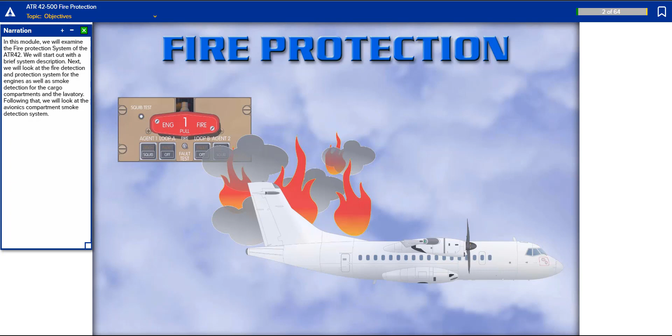In this module, we will examine the fire protection system of the ATR 42. We will start out with a brief system description. Next, we will look at the fire detection and protection system for the engines as well as smoke detection for the cargo compartments and the lavatory. Following that, we will look at the avionics compartment smoke detection system.

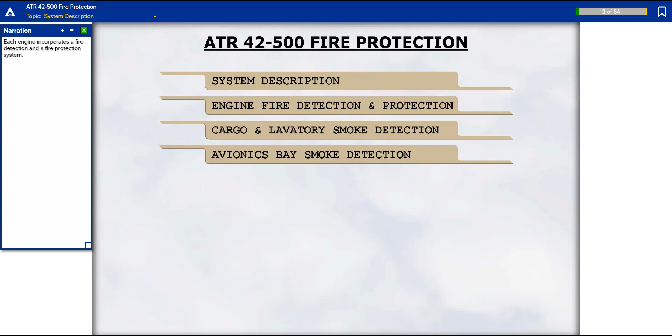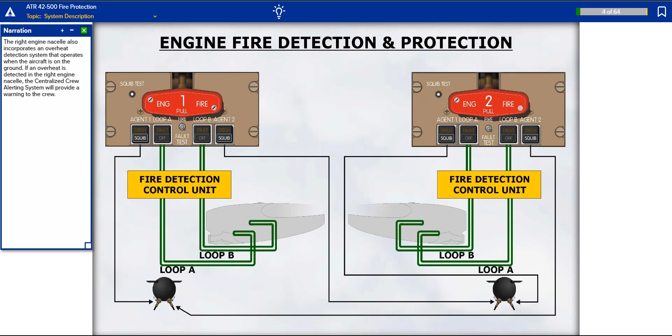Each engine incorporates a fire detection and fire protection system. The right engine nacelle also incorporates an overheat detection system that operates when the aircraft is on the ground. If an overheat is detected in the right engine nacelle, The centralized crew alerting system will provide a warning to the crew.

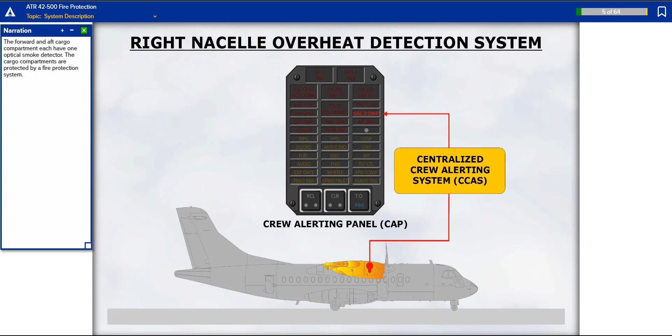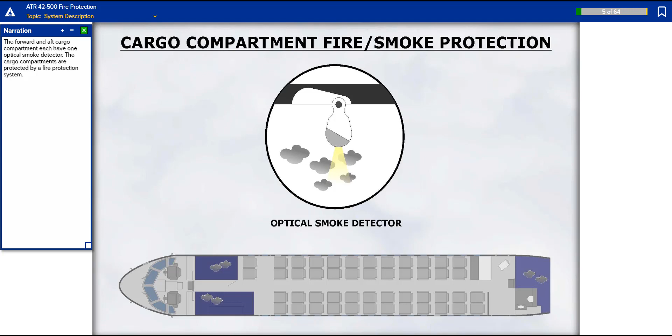The forward and aft cargo compartment each have one optical smoke detector. The cargo compartments are protected by a fire protection system. The lavatory uses a photoelectric smoke detector to provide an alert in the event there is smoke in the lavatory. A small fire protection bottle protects the lavatory waste bin.

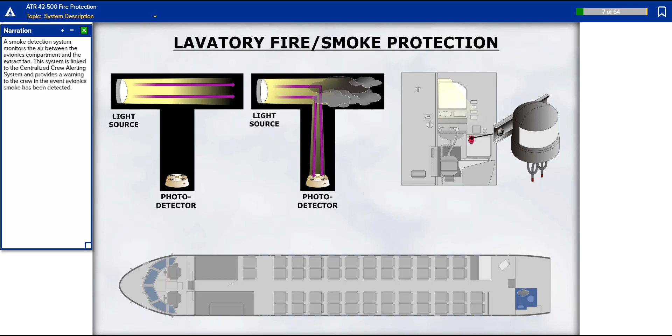A smoke detection system monitors the air between the avionics compartment and the extract fan. This system is linked to the centralized crew alerting system and provides a warning to the crew in the event avionics smoke has been detected.

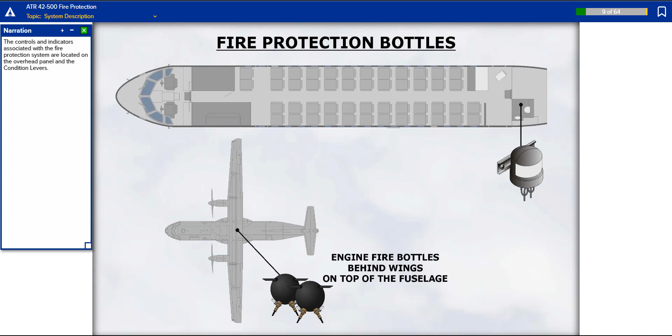Various fire protection bottles are located throughout the aircraft. The controls and indicators associated with the fire protection system are located on the overhead panel and the condition levers.

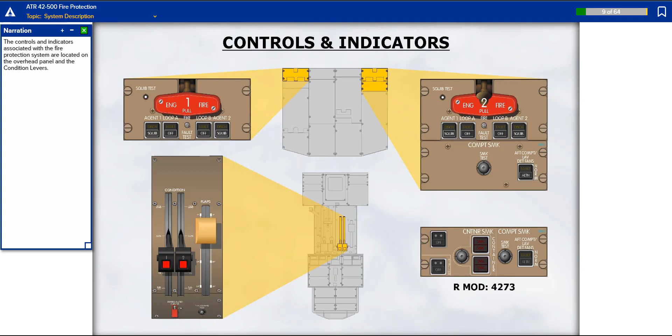Each engine incorporates a fire detection system. The system consists of two identical detection loops called Loop A and Loop B. These loops are parallel to each other, and they are connected to a fire detection control unit. The loops are powered by the DC emergency bus.

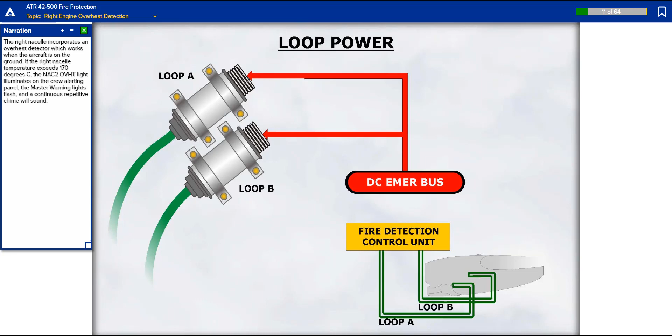The right nacelle incorporates an overheat detector which works when the aircraft is on the ground. If the right nacelle temperature exceeds 170 degrees Celsius, the Nacelle 2 overheat light illuminates on the crew alerting panel, the master warning lights flash, and a continuous repetitive chime will sound.

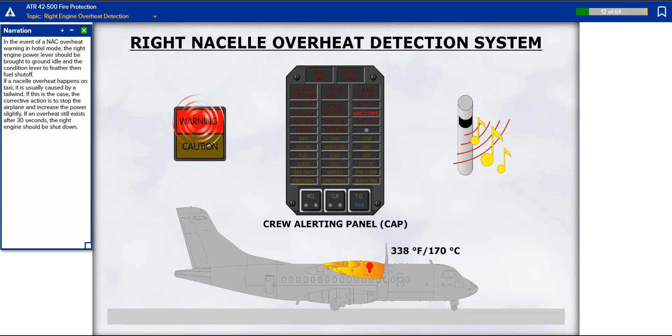In the event of a nacelle overheat warning in hotel mode, the right engine power lever should be brought to ground idle and the condition lever to feather, then fuel shutoff. If a nacelle overheat happens on taxi, it is usually caused by a tailwind. If this is the case, the corrective action is to stop the airplane and increase the power slightly. If an overheat still exists after 30 seconds, the right engine should be shut down.

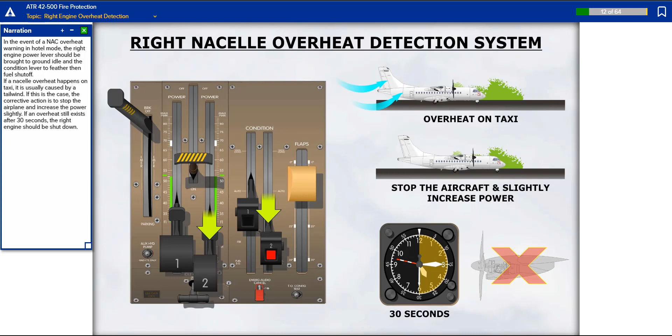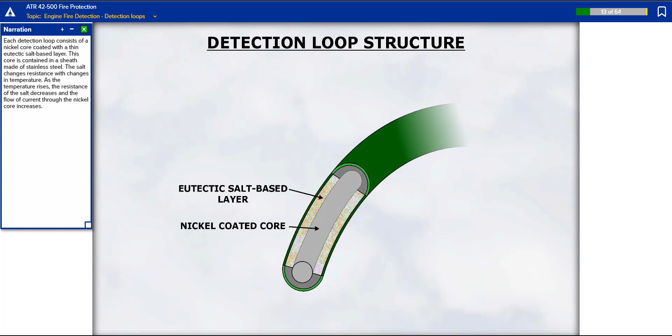Each detection loop consists of a nickel core coated with a thin eutectic salt-based layer. This core is contained in a sheath made of stainless steel. The salt changes resistance with changes in temperature. As the temperature rises, the resistance of the salt decreases and the flow of current through the nickel core increases. The electrical signal flows in a continuous loop to the Fire Detection Control Unit, or FDCU.

The FDCU measures the resistance in the loop as well as the capacitance. The FDCU will trigger a fire warning if there has been a decrease in resistance and an increase in capacitance of both fire loops. Both loops must detect a fire in order to trigger a fire warning.

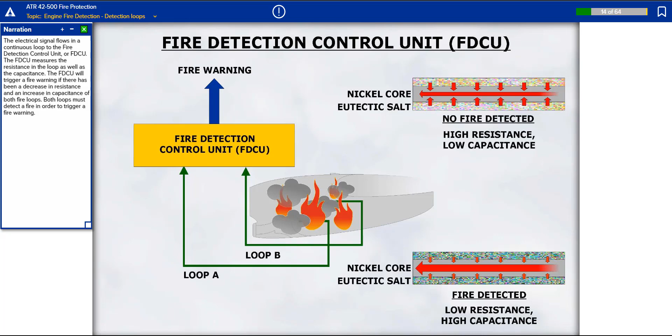If an engine fire has been detected, the continuous repetitive chime will sound, the master warning light will flash, the associated fire handle will illuminate red, a red fuel shutoff light will illuminate in the associated condition lever, and the associated engine fire light on the crew alerting panel will illuminate.

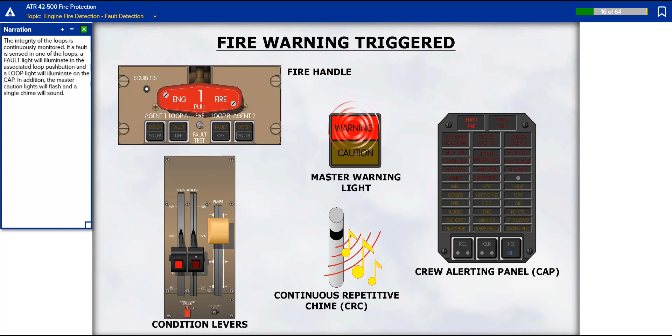The integrity of the loops is continuously monitored. If a fault is sensed in one of the loops, a fault light will illuminate in the associated loop push button, and a loop light will illuminate on the crew alerting panel. In addition, the master caution lights will flash and a single chime will sound.

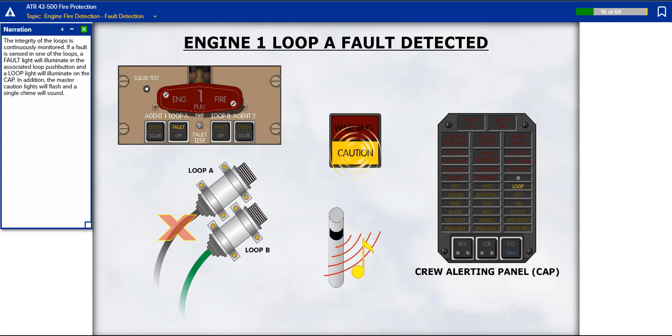If the fault light in a loop push button illuminates, it indicates that the associated loop has faulted and therefore must be deselected. If it is not deselected, the system will not be able to detect a fire since both loops must be in agreement. The affected loop is deselected by releasing out the push button with the illuminated fault light. This reconfigures the associated fire detection system so that only the other fire detection loop is used to detect an engine fire. Click on the loop light with the illuminated fault light to reconfigure the system.

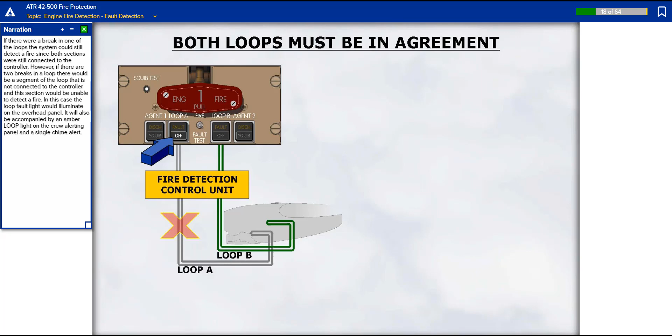If there were a break in one of the loops, the system could still detect a fire since both sections were still connected to the controller. However, if there are two breaks in a loop, there would be a segment of the loop that is not connected to the controller, and this section would be unable to detect a fire. In this case, the loop fault light would illuminate on the overhead panel. It would also be accompanied by an amber loop light on the crew alerting panel and a single chime alert.

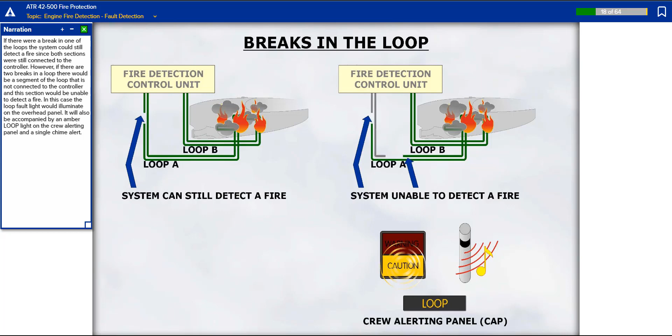Note that a broken loop would cause a decrease in the resistance of the circuit. But since there was no increase in capacitance, a fire warning would not be triggered.

Conversely, excessive heat in an engine compartment can trigger a fire warning even if there is no fire, for instance from a bleed leak. In this case, don't fire the bottle until it is determined that closing the bleed valve doesn't silence the fire warning.

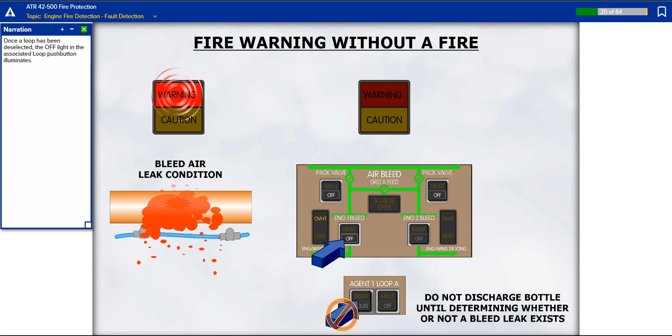Once a loop has been deselected, the off light in the associated loop push button illuminates.

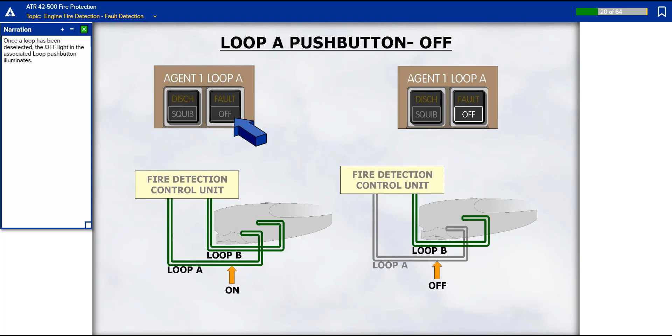The engine fire protection consists of two fire bottles. The fire bottles contain halon gas pressurized to 600 psi. The fire bottles are located on each side of the fuselage. The plumbing of the system allows the content of either bottle to be used to suppress a fire in either engine.

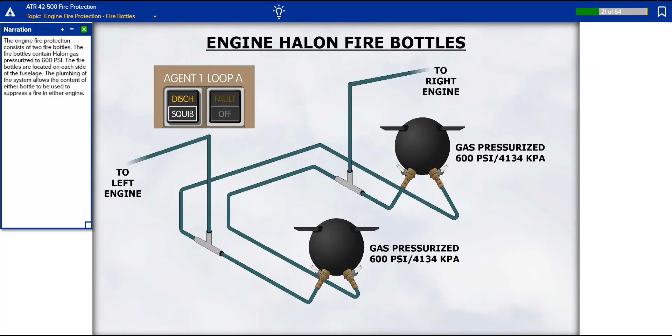The gas in the fire bottles is retained by seals. There are 2 seals per bottle. Gas is released into an engine by firing a squib which punctures the associated seal and allows the halon to flow through the associated line and into the associated engine. The squib consists of a pyrotechnic charge that is electrically detonated. Each squib can only be fired once.

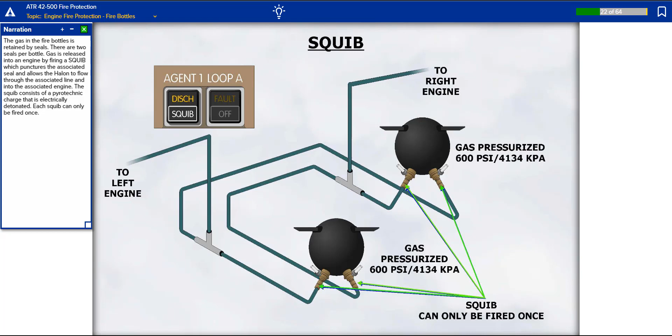When a fire bottle has been discharged, the discharge captions on the associated squib push button of both fire panels will illuminate. They both illuminate since each push button is connected to the associated bottle.

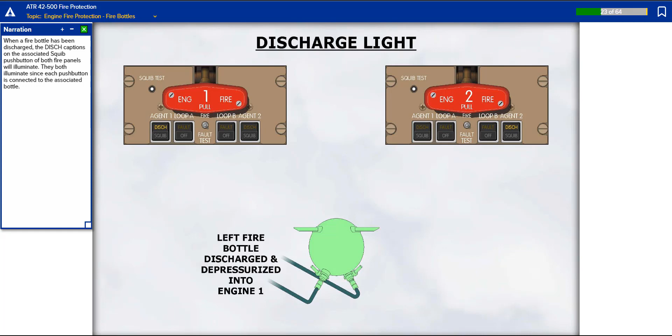The fire bottles are plumbed to the engines in such a way that firing Agent 1 into one engine is the same as firing Agent 2 of the other engine. For example, if you fire Agent 1 into the left engine, the Agent 1 discharge light illuminates on the overhead panel for that engine. At the same time, the Agent 2 discharge light illuminates for the right engine on that side of the overhead panel.

Two identical engine fire panels are located on the overhead panel. Each incorporates a fire handle, loop push button, and two agent push buttons.

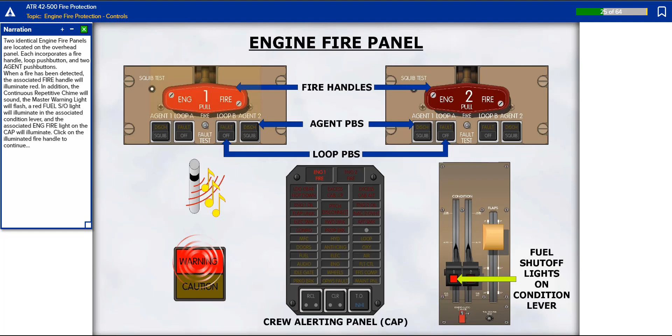When a fire has been detected, the associated fire handle will illuminate red. In addition, the continuous repetitive chime will sound, the master warning light will flash, a red fuel shutoff light will illuminate in the associated condition lever, and the associated engine fire light on the crew alerting panel will illuminate. Click on the illuminated fire handle to continue.

The fire handles are mechanically locked by safety-wired spring latches. A latch can be thumb-released in order to allow the fire handle to be pulled down. Make sure that the handles are pushed in prior to pre-flight checking the system.

It should be noted that the fire handle will remain illuminated as long as a fire is detected. This is true regardless of the fire handle position. The light will only extinguish after a fire is no longer detected.

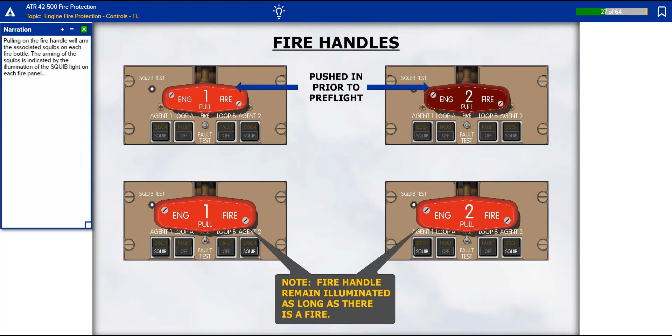Pulling on the fire handle will arm the associated squibs on each fire bottle. The arming of the squibs is indicated by the illumination of the squib light on each fire panel.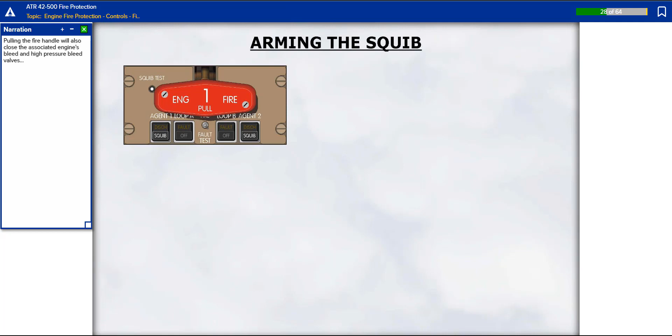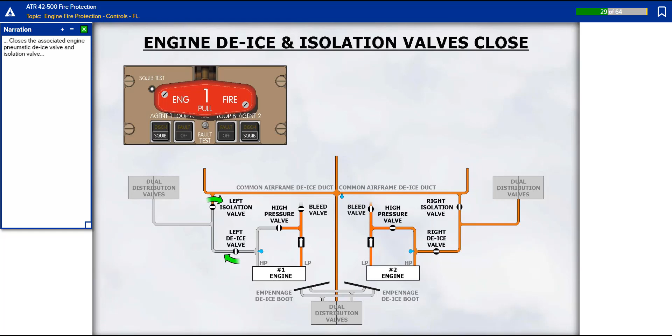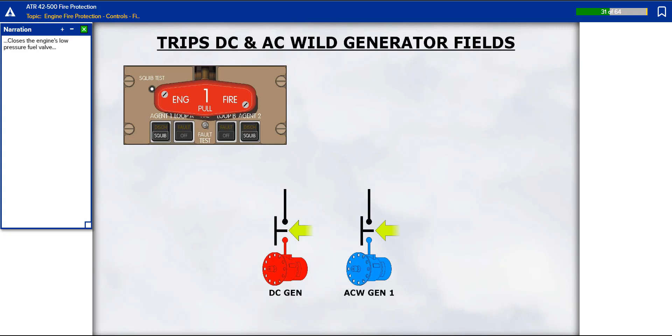Pulling the fire handle will also close the associated engine's bleed and high-pressure bleed valves. It closes the associated engine pneumatic de-ice valve and isolation valve, trips the associated DC and AC wild generator fields, closes the engine's low-pressure fuel valve, and runs the electric feathering pump to feather the propeller.

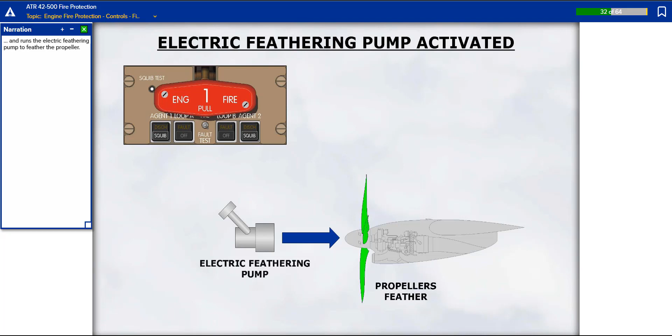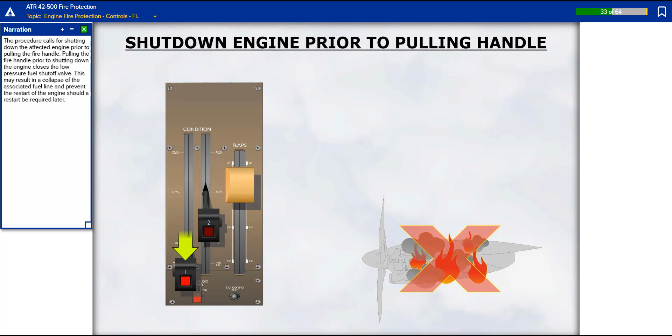The procedure calls for shutting down the affected engine prior to pulling the fire handle. Pulling the fire handle prior to shutting down the engine closes the low-pressure fuel shutoff valve. This may result in a collapse of the associated fuel line and prevent the restart of the engine should a restart be required later.

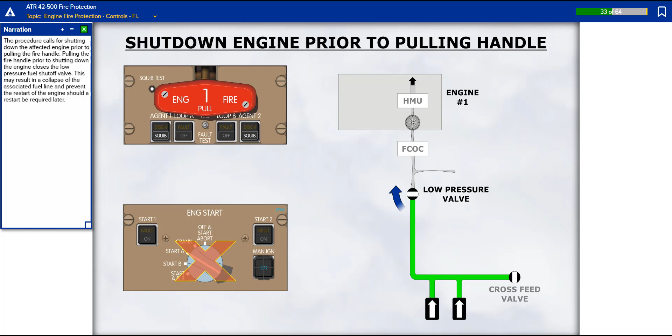After the fuel is shut off, the light in the associated condition lever will extinguish. This light will also automatically extinguish after a fire is no longer detected.

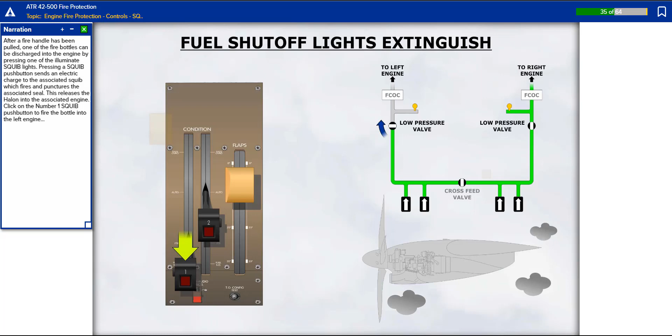After a fire handle has been pulled, one of the fire bottles can be discharged into the engine by pressing one of the illuminated squib lights. Pressing a squib push button sends an electric charge to the associated squib, which fires and punctures the associated seal. This releases the halon into the associated engine. Click on the number 1 squib push button to fire the bottle into the left engine.

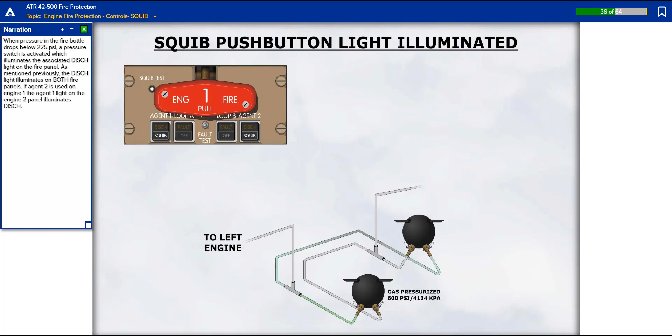When pressure in the fire bottle drops below 225 psi, a pressure switch is activated which illuminates the associated discharge light on the fire panel. As mentioned previously, the discharge light illuminates on both fire panels. If Agent 2 is used on Engine 1, the Agent 1 light on the Engine 2 panel illuminates discharge.

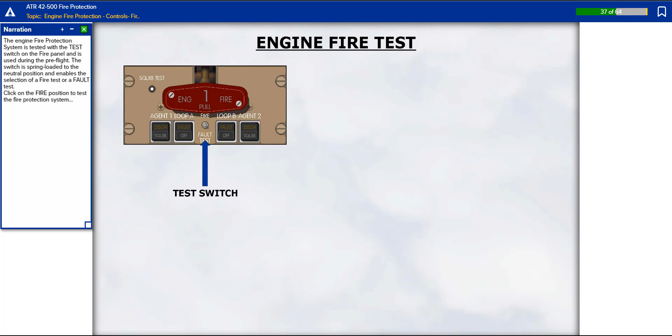The engine fire protection system is tested with the test switch on the fire panel and is used during the pre-flight. The switch is spring-loaded to the neutral position and enables the selection of a fire test or a fault test. Click on the fire position to test the fire protection system.

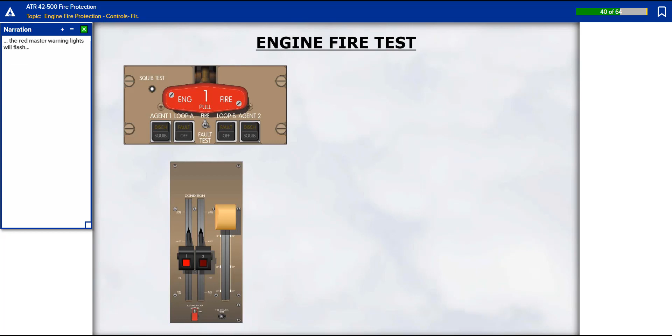With both loops selected on, the fire test position will illuminate the associated fire handle, illuminate a fuel shutoff light in the associated condition lever if the lever is not in the fuel cutoff position, the red master warning lights will flash, a continuous repetitive chime sounds,

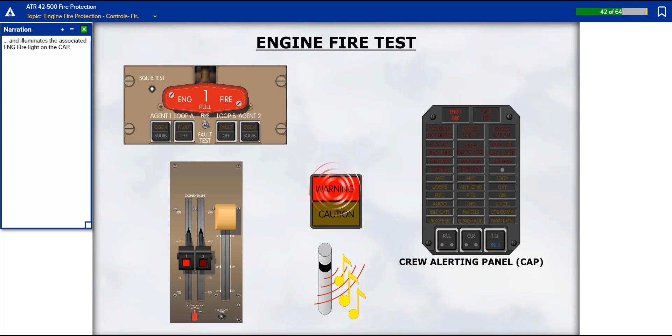Placing the test switch in the fault position will test the loop circuitry for any faults. Click on the fault position to test the fault circuitry.

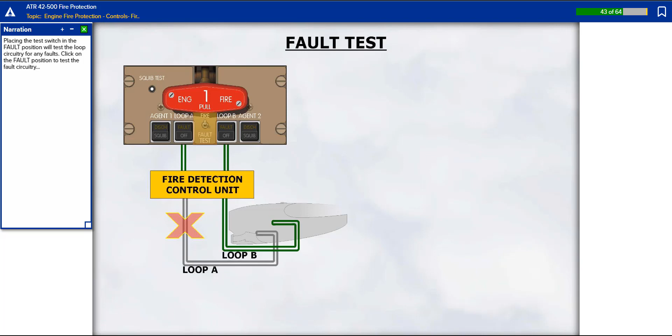The fault position tests the detector loops. The indications of a successful test consist of the illumination of the fault lights in both Loop A and Loop B push buttons, the master caution lights flash, and the loop light on the crew alerting panel illuminates. In addition, a single chime will sound.

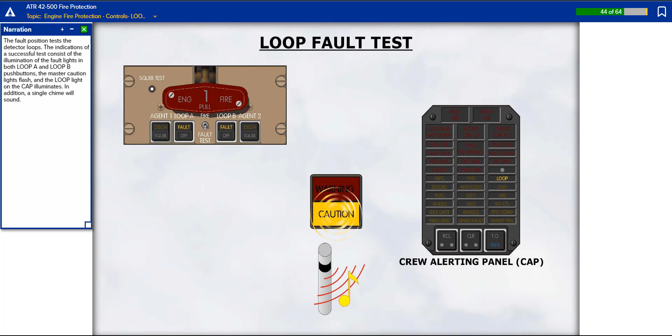The squib test push button is used to check the continuity of the squib circuitry. Pressing the test button sends a test signal to the squibs. The signal is the same one that fires the squib but uses a weaker current. The test is successful if both squib lights illuminate. If either squib light fails to illuminate, it indicates a problem with the associated squib.

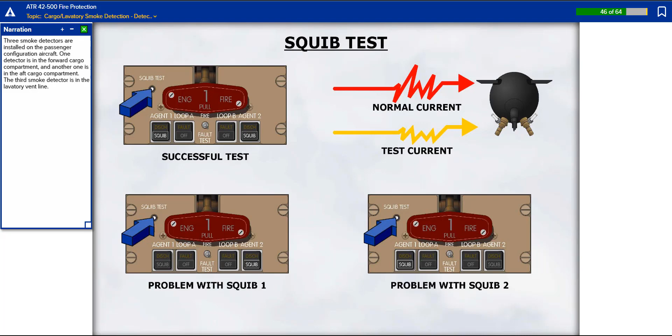Three smoke detectors are installed on the passenger configuration aircraft. One detector is in the forward cargo compartment, and another one is in the aft cargo compartment. The third smoke detector is in the lavatory vent line.

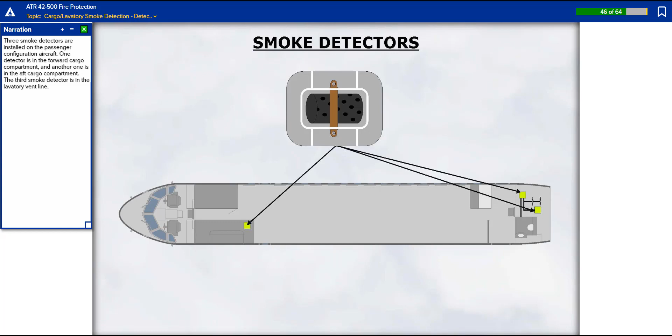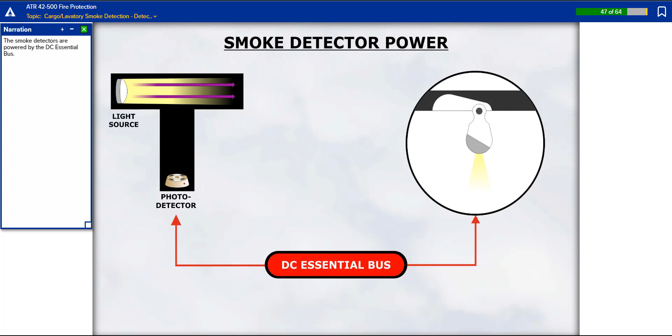The smoke detectors are powered by the DC Essential bus. The detectors sense the presence of smoke and do not detect fires. The cargo smoke detectors measure reflection of light from a projector. When light is reflected, it indicates the presence of smoke.

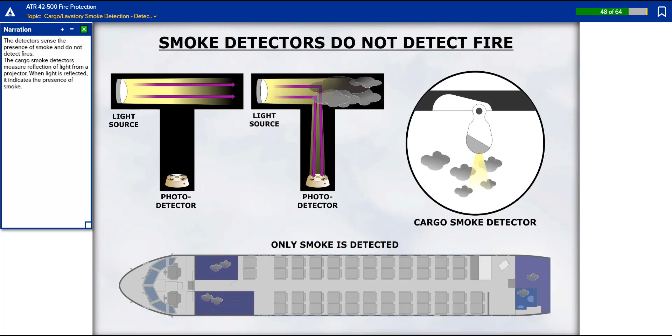The lavatory smoke detector is equipped with a photoelectric smoke detector. A smoke warning is triggered when smoke is detected by this sensor.

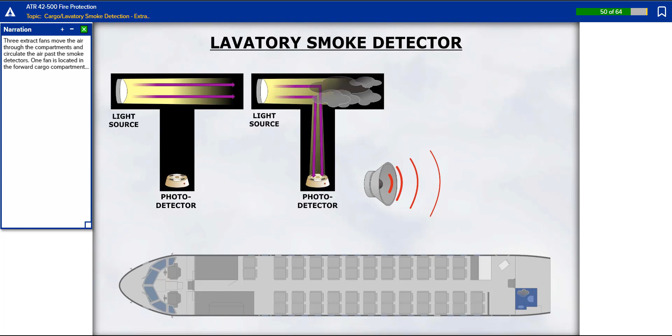Three extract fans move the air through the compartments and circulate the air past the smoke detectors. One fan is located in the forward cargo compartment, and two are located in the aft cargo compartment. Only one of the aft cargo fans runs at a time.

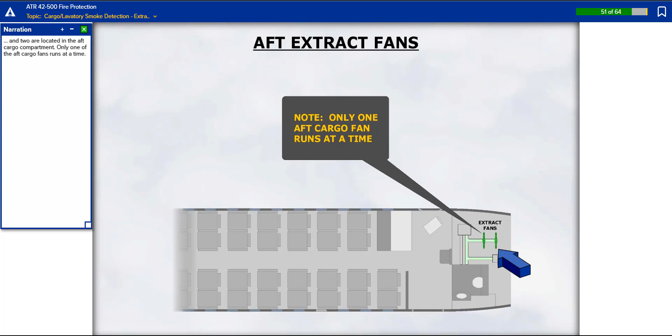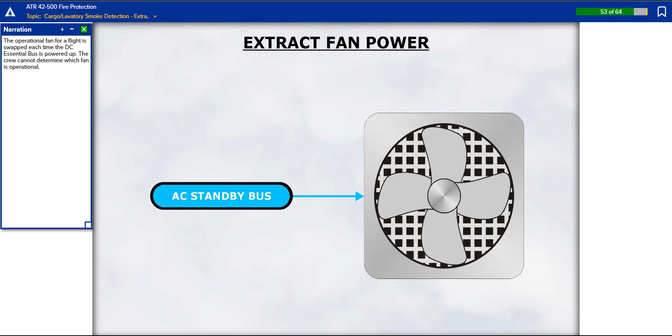The extract fans are powered by the AC standby bus. The operational fan for a flight is swapped each time the DC essential bus is powered up. The crew cannot determine which fan is operational.

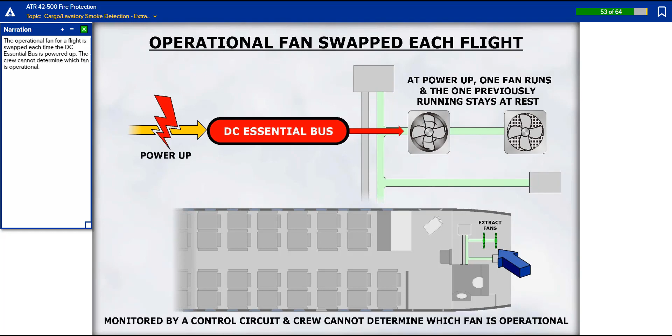If one of the fans fails, a CCAS alert is activated and the fault light in the aft compartment lav detector fan's push button illuminates. The alternate fan can be selected by pressing the aft compartment lav smoke detector push button. This will cause the alternate caption to illuminate in the push button.

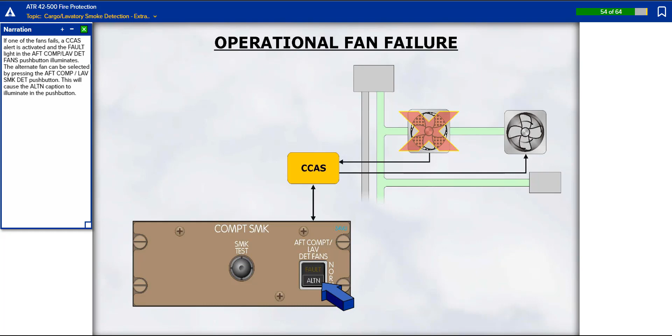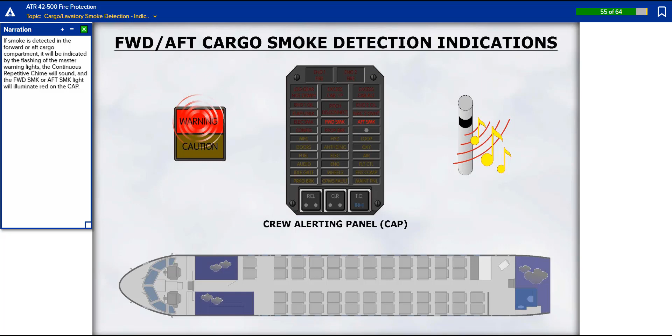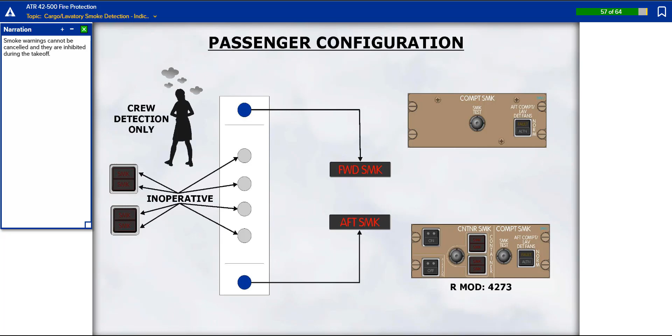Smoke warnings cannot be canceled and they are inhibited during the takeoff.

The cargo compartments do not incorporate a fire suppression system. However, a portable fire extinguisher can be used to discharge the content of the extinguisher bottle through a port that is installed in some aircraft near the flight attendant panel.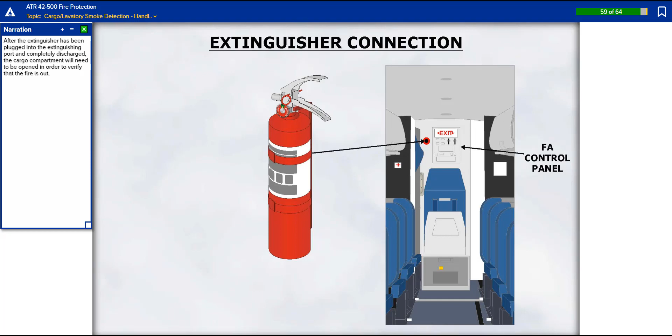After the extinguisher has been plugged into the extinguishing port and completely discharged, the cargo compartment will need to be opened in order to verify that the fire is out.

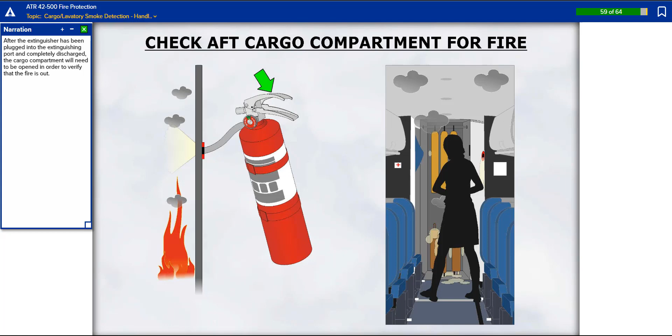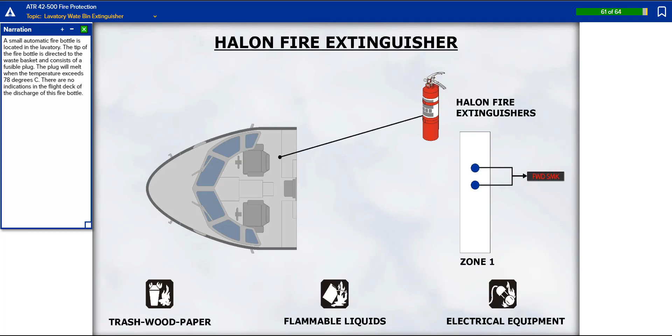A small automatic fire bottle is located in the lavatory. The tip of the fire bottle is directed to the wastebasket and consists of a fusible plug. The plug will melt when the temperature exceeds 78 degrees Celsius. There are no indications in the flight deck of the discharge of this fire bottle.

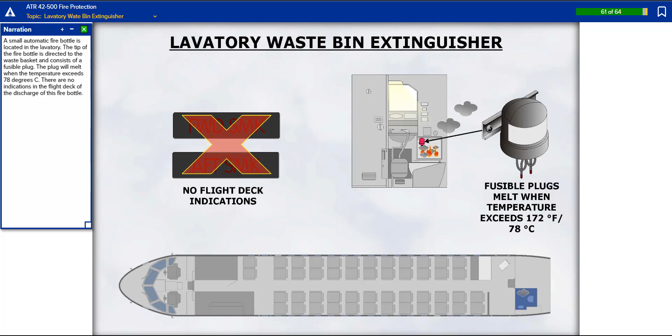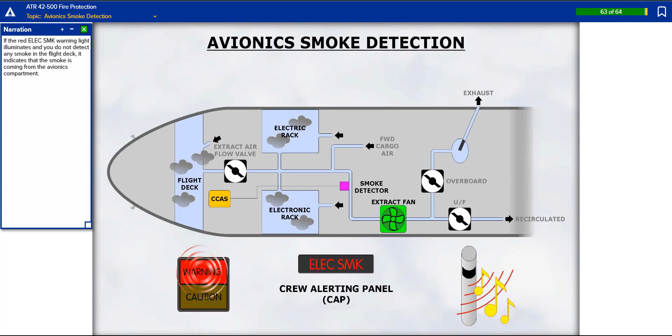If the red electric smoke warning light illuminates and you do not detect any smoke in the flight deck, it indicates that the smoke is coming from the avionics compartment.

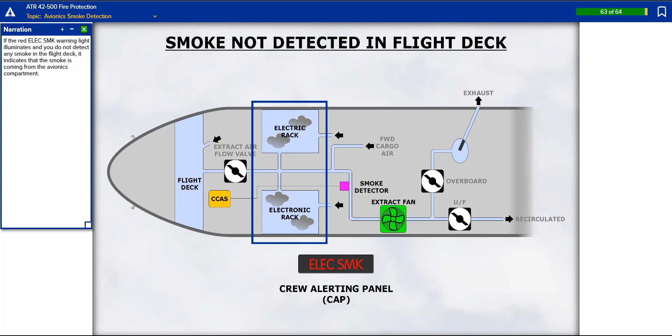This concludes the fire protection section.